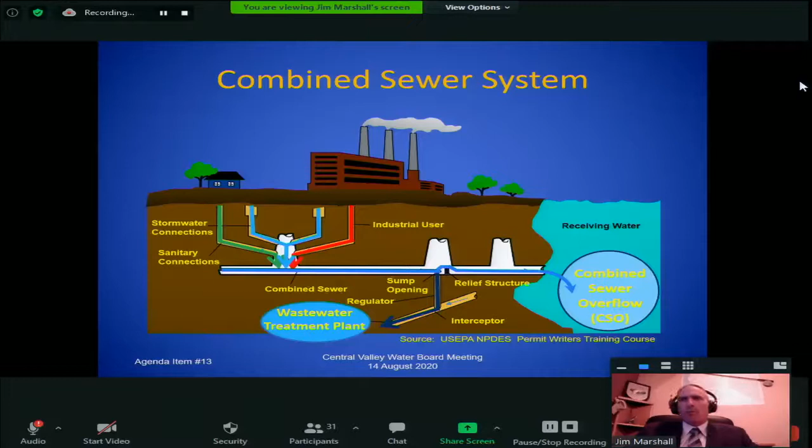Combined sewer systems are unique and are permitted differently than other NPDES dischargers. So next, I will discuss the basics of the regulatory framework for combined sewer systems.

Combined sewer overflows are defined as a discharge from a combined sewer system at a point prior to the publicly owned treatment works, or POTW. Unlike most typical wastewater treatment plants that discharge continuously, overflows from combined sewer systems occur infrequently for short durations and only as a result of significant storm events.

Combined sewer overflows are point source discharges subject to the Clean Water Act's NPDES regulations. Combined sewer overflows are regulated by US EPA's Combined Sewer Overflow Control Policy that was adopted in 1994.

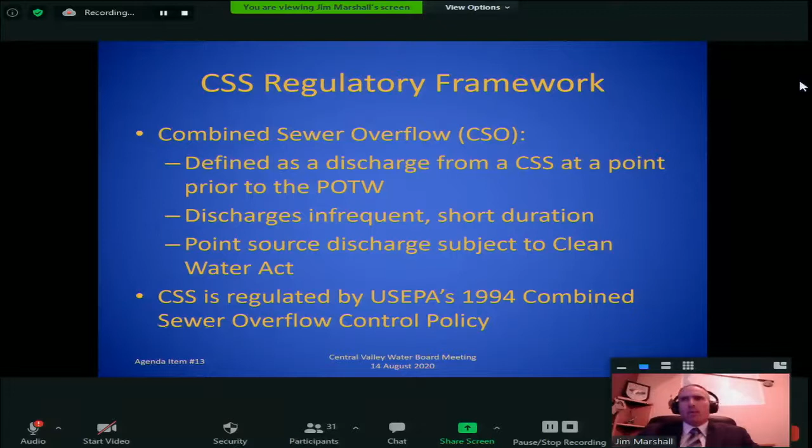The Combined Sewer Overflow Control Policy was adopted to provide a national framework for communities to comply with requirements of the Clean Water Act. The two main elements of the policy are implementation of 9 minimum controls, which are technology-based actions that require implementation of best management practices to reduce combined sewer overflows and their effects on receiving water quality. The second aspect is the development of long-term control plans for controlling combined sewer overflows to ensure protection of water quality standards. I will discuss these in more detail a little later in my presentation.

So next I will discuss the combined sewer system operations for the City of Sacramento system. This is a slide I showed earlier of the combined sewer system. The Sacramento combined system includes both in-system storage facilities and treatment facilities that provide storage to reduce the number of combined sewer overflow discharges.

The in-system storage facilities include oversized sewer pipes or storage vaults, such as the McKinley vault that I will discuss later. These in-system storage facilities are used to equalize peak flows from high rainfall events that can overtax the collection system. The storage systems help reduce the number of combined sewer overflows to the river and reduce surcharging of the system that can result in combined sewer system outflows and flooding. An outflow is where the pipes are surcharged and combined stormwater and wastewater exit the system.

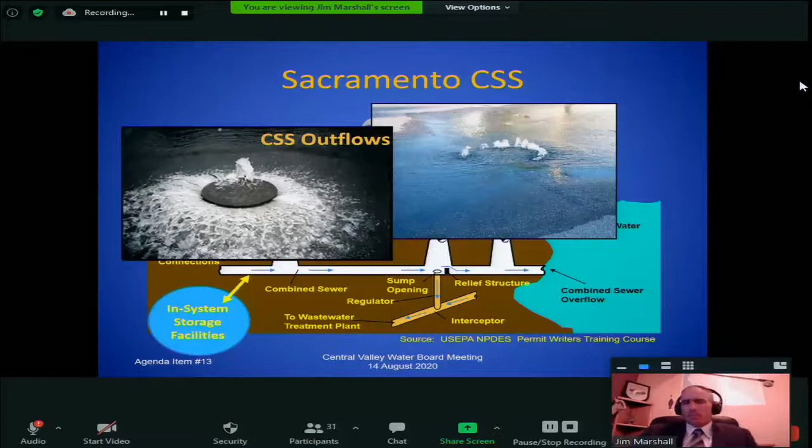The Sacramento combined system also includes 2 treatment plants that provide storage. After storm flows subside, combined wastewater stored in the treatment systems can be routed back to the wastewater treatment plant. If a discharge is needed, the Sacramento combined system is able to treat most of the discharges with primary treatment and chlorine disinfection.

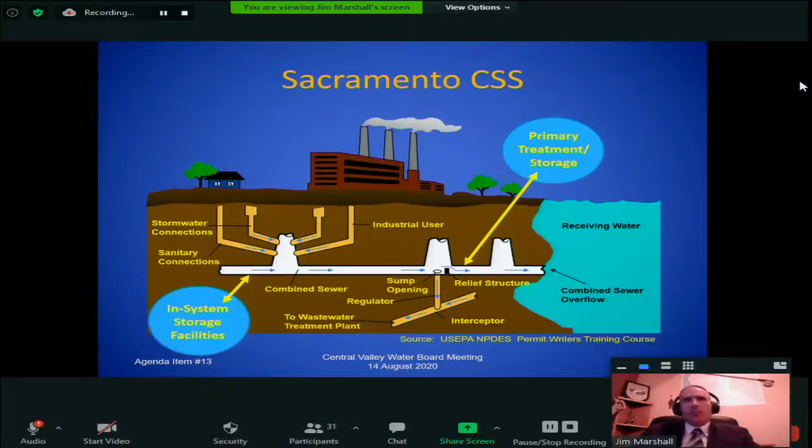So under most conditions, the typical operation is routing up to 60 million gallons per day of flow from the collection system to the Sacramento Regional Wastewater Treatment Plant. The annual average daily flow rate sent to Sacramento Regional is approximately 17 million gallons per day. The proposed permit requires the city maximize the amount of combined wastewater that is routed to the Sacramento Regional Wastewater Treatment Plant for treatment. The city accomplishes this by utilizing the storage in the system.

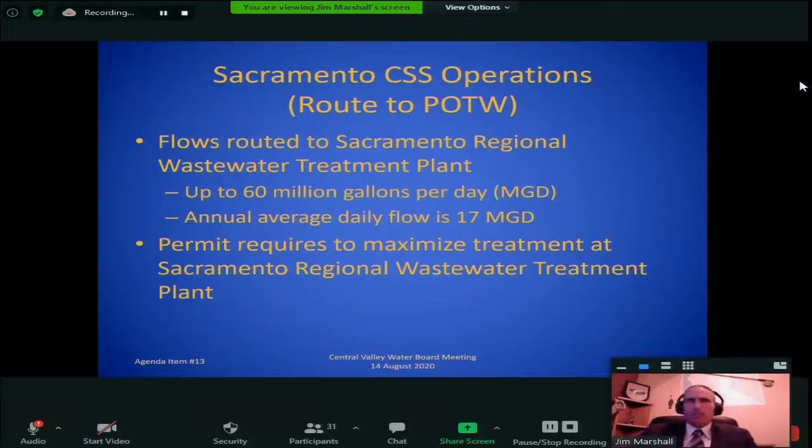However, when the Sacramento combined sewer system is overtaxed during rare extreme high stormwater flow conditions, the system discharges mixed stormwater and sewage to the Sacramento River with only primary or no treatment, which carries the risk of public exposure. The risk is minimized during the time period of these discharge events due to high river flows and stormy weather in which contact recreation is minimal.

For the Sacramento combined system, nearly all combined sewer overflow discharges are treated. When storage capacities are depleted, the mixed stormwater and wastewater receive primary treatment, chlorine disinfection, and dechlorination prior to discharge to the Sacramento River. The events are typically infrequent and short in duration, about 4 to 5 hours, but can last for a day or more during large storms. Over the past 10 years, the city has averaged 5 discharge events per year.

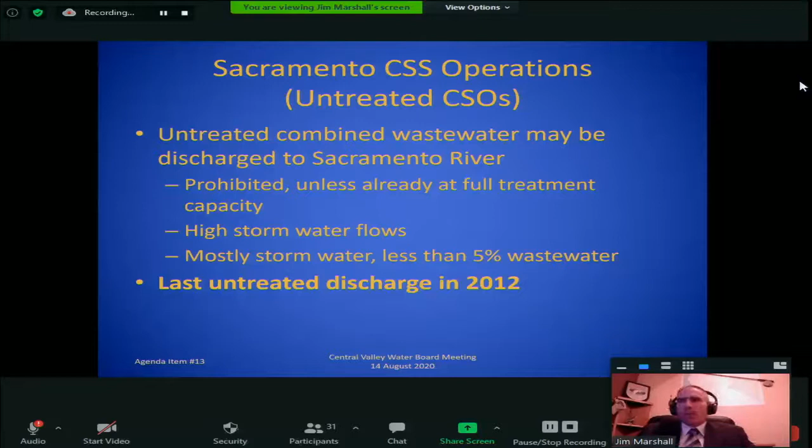During extremely wet conditions, untreated mixed stormwater and wastewater from the combined system may discharge to the Sacramento River. The proposed permit prohibits untreated discharges unless the city's treatment systems are operating at full capacity. These discharges are very rare and dictated by high stormwater flows in the system, where wastewater makes up only a small fraction of the total flow. The last untreated discharge was in December 2012.

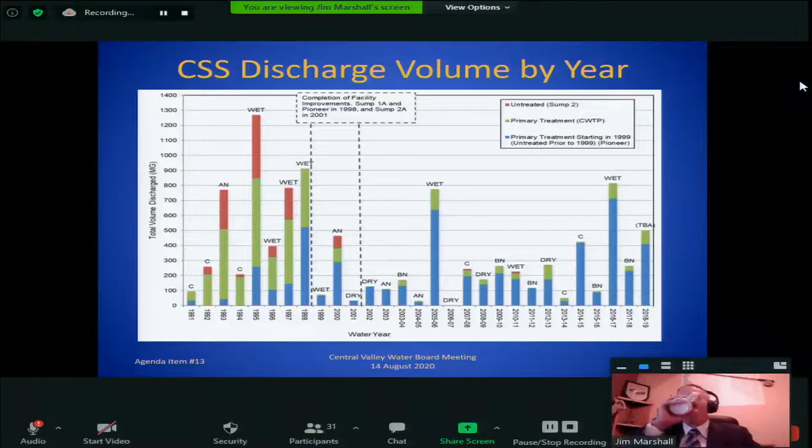Excuse me. So next, I think I need some more water. Hold on a sec. The tea wasn't cutting it.

All right, so next I will discuss the main permit requirements for the combined sewer system. The permit includes effluent limitations and monitoring requirements. Effluent limitations are included based on best management practices for operation and treatment to minimize discharge of total suspended solids, settleable solids, pH, and pathogens. Effluent limitations are also included for chlorine residual, temperature, some pesticides, and methylmercury to implement water quality objectives and total maximum daily loads to protect beneficial uses of the Sacramento River.

Sorry. Furthermore, the proposed permit includes monitoring requirements for effluent and receiving water to evaluate compliance with limits and characterize the discharge and receiving water for next renewal. Having trouble here.

All right. The proposed permit requires continued implementation of the 9 minimum controls included in the CSO control policy, which are best management practices. Some of these best management practices include proper operation and maintenance, maximizing collection system storage, maximizing delivery to the Sacramento Regional Wastewater Treatment Plant, providing primary treatment of combined sewer overflows prior to discharge, and providing public notification when overflows or outflows occur. These controls are implemented as provisions in the proposed permit. The discharger is required to submit annual reports demonstrating compliance with the 9 minimum controls.

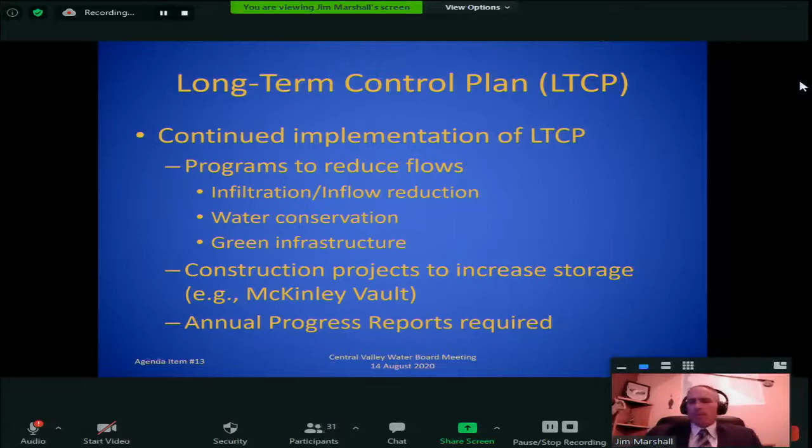Due to concerns about increasing flows from growth within the city, such as the rail yards and river district, the proposed permit includes a new provision requiring the city implement measures to ensure growth does not result in additional CSOs, outflows, or an overall reduction in percentage of flow delivered to the Sacramento Regional Wastewater Treatment Plant. In addition, an update to the long-term control plan is required to estimate the 30-year build-out flows and identify projects to address increased flows, as well as evaluate the outflow goals that have been in place since the late 90s to ensure they are adequately protective of public health.

Consultation with appropriate public health officials is required. Finally, the city must update the design storms that are used for their modeling based on current climatic information and considering the effects of climate change.

Finally, the proposed permit requires an updated water quality assessment to evaluate the effectiveness of the combined sewer system operations in meeting water quality standards in the Sacramento River to protect beneficial uses. The city last conducted a water quality assessment in 2013 that demonstrated water quality standards were being met. Due to recent construction of nearby downstream drinking water intake and new statewide bacteria water quality objectives, board staff will be looking for a thorough evaluation of possible impacts to the municipal and domestic water supply beneficial use.

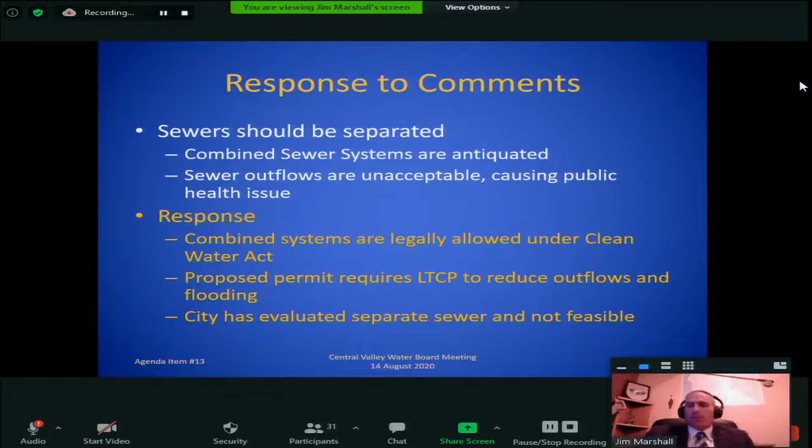The issue of continued improvement of the Sacramento combined system versus construction of separate storm and sanitary sewer systems was studied extensively in the 1990s. Following a series of major outflows that were flooding the streets, residents, restaurants, and businesses, the Central Valley Water Board issued a cease and desist order in 1990, which required the city to submit a detailed technical report and propose future time schedules for improvements to the combined system to reduce the outflows. The city submitted the subject reports, and the Central Valley Water Board adopted waste discharge requirements, approving the city's interim operational changes until final improvements could be made.

The city conducted numerous studies between 1990 and 1994, including an evaluation of the option of sewer separation. In the meantime, as previously discussed, US EPA established the combined sewer overflow control policy that set a consistent national approach to regulate combined sewer systems. The city studies determined that separation was infeasible due to the magnitude of construction, waste generation from removal of the existing combined sewer system, increased water quality impacts, and substantial costs.

More immediate actions needed to be taken to address flooding issues. In 1996, the regional board updated the waste discharge requirements, accepting the proposed solution and implementing EPA's CSO control policy. This put the city on its current path to develop projects to minimize flows and increase storage throughout the combined system to reduce outflows and flooding.

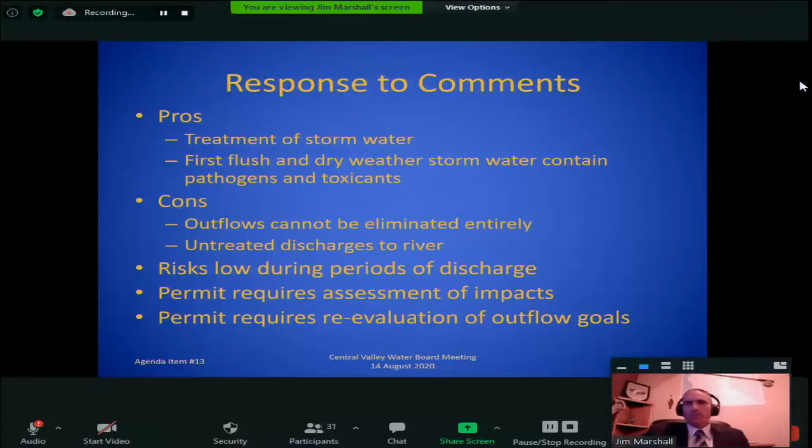The next comment is a concern about extensive growth in the Sacramento combined sewer system. New planned urban growth will increase flows, resulting in more outflows and overflows.

The city's combined sewer system development policy requires capacity management. Flow increases from new development cannot result in an increase in outflows or overflows. Developers have to offset flow increases with projects that reduce outflows and overflows.

The city is also implementing projects that result in reduced flows, such as water conservation, infiltration and inflow reduction in the separated sewers, and green infrastructure projects to reduce stormwater runoff.

Although the city has policies to address growth, board staff share the concerns that growth could result in increased combined sewer overflows, combined system outflows, or an overall reduction in the percentage of flow delivered to Sac Regional, and have modified the tentative permit to include additional provisions.

As mentioned earlier, the proposed permit includes new provisions to address growth and a requirement to update the long-term control plan to evaluate 30-year build-out flow. In addition, the long-term control plan annual reporting, the proposed permit requires the city specifically address what they did the previous year to manage flows due to growth.

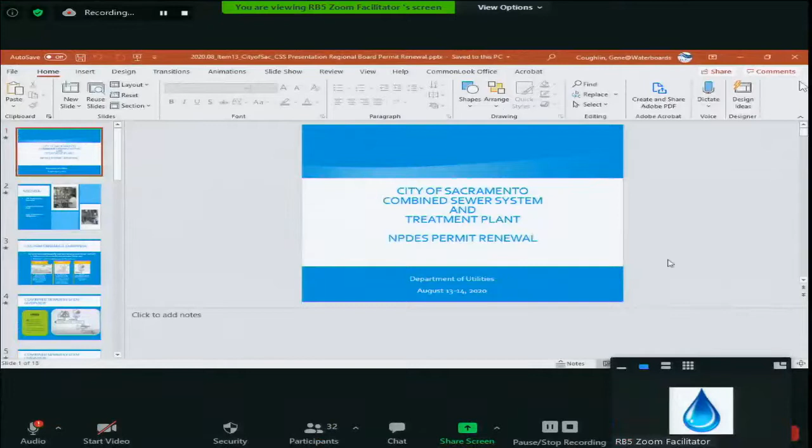What works best, Gene? I am prepared to run that for you. I just want to make sure I load the correct one. Is that the City of Sac CSS presentation? Yes, let me start that for you. Thank you. Okay, I will share my screen. And you should see that now. Excellent, thank you very much.

All right, I will go ahead and get started. Chair Longley and members of the board, my name is Tony Bertrand, and I am the engineering manager for the City of Sacramento Department of Utilities, and I have taken the oath. Thank you for the opportunity to provide information about the city's combined sewer system. I would first like to thank the board staff for the hard work they've done to develop the permit before you today for your consideration. Next slide, please.

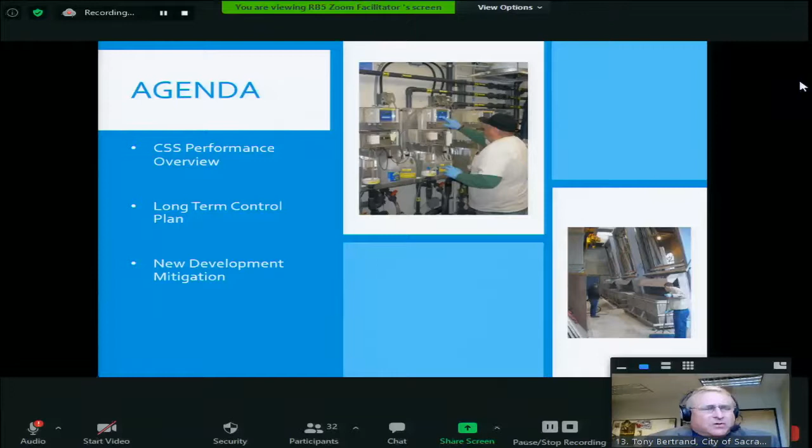Today, I will be covering the following items: an overview of the combined sewer system performance, an overview of the long-term control plan, an overview of new development mitigation, and some background on the decision not to pursue system separation. I realize that some of these items are similar to what board staff Marshall presented. I believe that while some of it is redundant, I take a little bit of a different approach on some of these, so I'm going to go ahead and go through the slides as they're presented. Next slide, please.

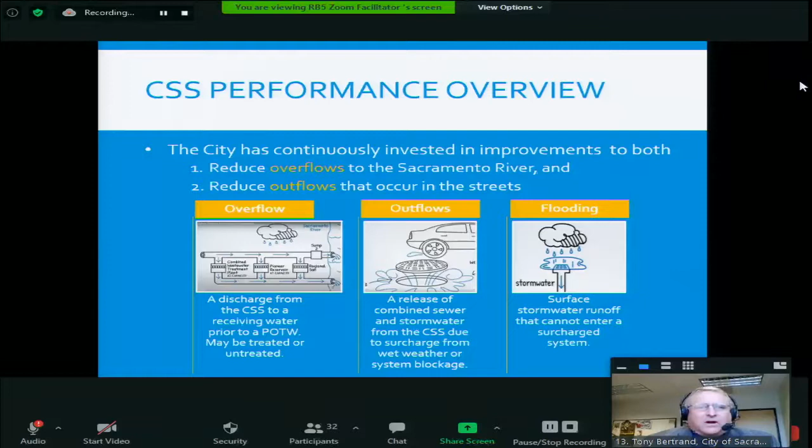Operationally, there are three different stages of discharges from the combined sewer system. Stage one includes flows up to 60 million gallons per day, including all dry weather flows and small storm event flows. All of stage one flows are sent to the regional treatment plant for secondary treatment, representing greater than 90% of the annual wastewater and stormwater flows into the combined sewer system.

As Jim noted earlier, the average daily wastewater or dry weather flows are only about 17 million gallons a day, so the other 43 million gallons per day are available for the treatment of stormwater.

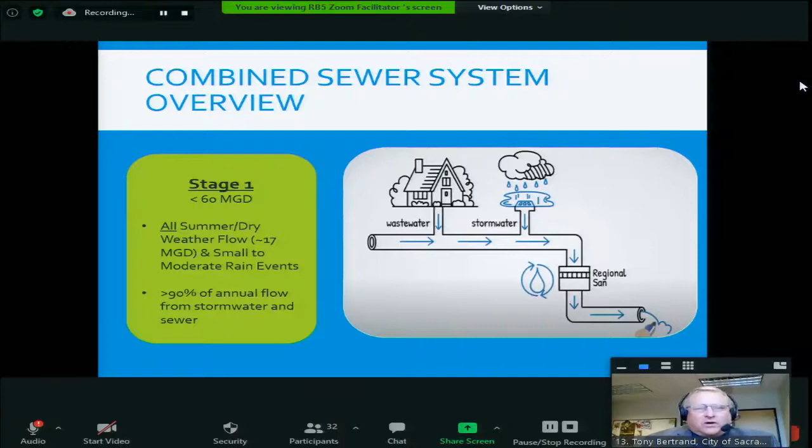Stage two includes flows between 60 million gallons per day and 440 million gallons per day. During stage two, flows greater than 60 MGD are sent to our two combined sewer treatment plants. These plants both provide primary treatment that includes removal of solids, disinfection with chlorine, and dechlorination prior to discharge to the Sacramento River. Less than 10% of annual flows are sent to the combined sewer system treatment plants. Stage 2 is typically reached during storms that produce greater than 1 inch of rainfall or high intensity rainfall events.

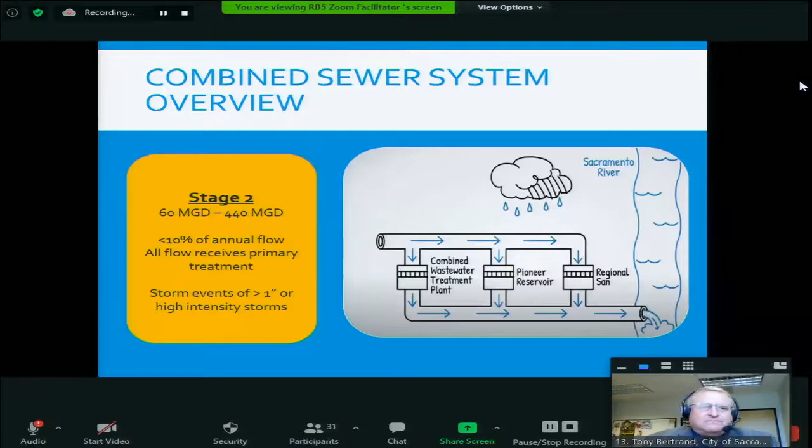Stage 3 is reached when flows are over 440 million gallons per day and the capacity of the two primary treatment plants is surpassed. The flows that cannot be treated are discharged directly to the Sacramento River. It's important to note that an untreated discharge bypassing our primary treatment plants has not occurred since December of 2012, and for that event, several rain gauges captured precipitation exceeding the 5-year and 10-year return period storms.

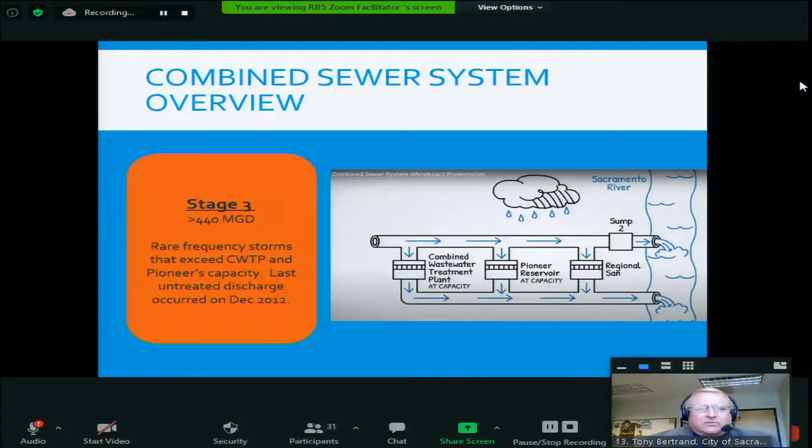During this year, greater than 99.9% of sewer flows were sent to the regional wastewater treatment plant for treatment. In addition, 3.8 billion gallons of stormwater received secondary treatment at the regional plant, and 0.45 billion gallons of stormwater received primary treatment by the city's two wastewater treatment plants. This stormwater would have been discharged directly to the Sacramento River without treatment if it were a separated system.

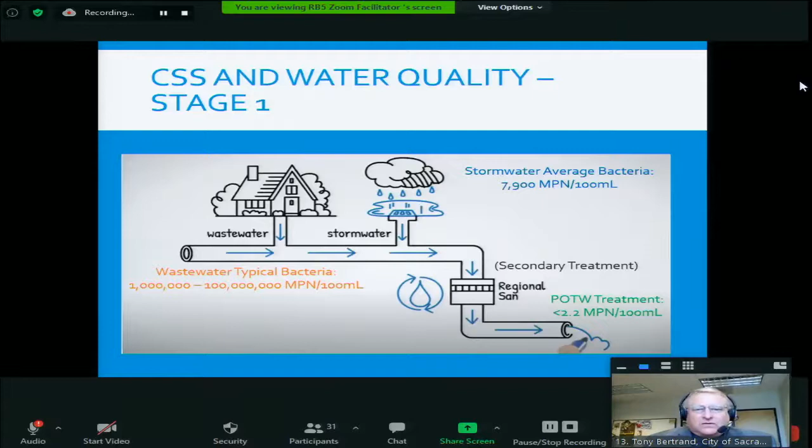Now to talk about water quality. There's a water quality benefit to having a combined system that is not always recognized. During stage 1, all dry weather flows, such as runoff from irrigation and what would be considered an illicit discharge in the separated storm system, receive secondary treatment at the regional treatment plant. This schematic shows typical levels of bacteria in the wastewater and stormwater systems and how the regional plant treats both the stormwater and wastewater to less than 2.2 mpn per 100 milliliters.

The water quality benefits during stage 2, when 60 MGD of stormwater and sewage are being treated by the regional water treatment plant, and the additional flows up to 440 MGD go to the city's two primary treatment plants. Primary treatment results in bacteria levels of less than 8 on average, just slightly higher than the bacteria levels after treatment at the regional plant.

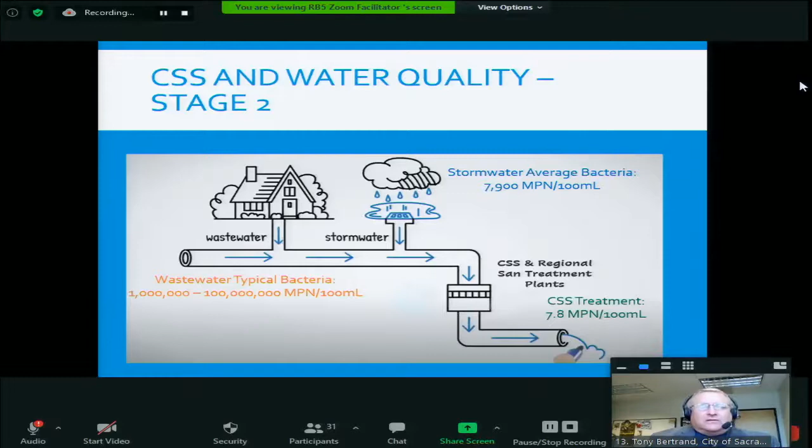So far, I've been talking about overflows from the combined sewer system that are discharges to the Sacramento River. Now I will discuss outflows. These are flows that occur when the system is at or above capacity and flows end up on the street. This has been an ongoing challenge, and the city has completed many projects since 1995, with more in construction or planned that will provide significant reductions in outflows.

From 1995 to 2018, work completed under the Combined Sewer System Improvement Plan included projects with a total cost of approximately $124 million. These projects reduced outflows by approximately 50%. From 2019 to 2026, $57 million is estimated to be spent on projects that are completed, in construction, or planned per the long-term control plan. These projects are estimated to reduce the remaining outflows by approximately 38%.

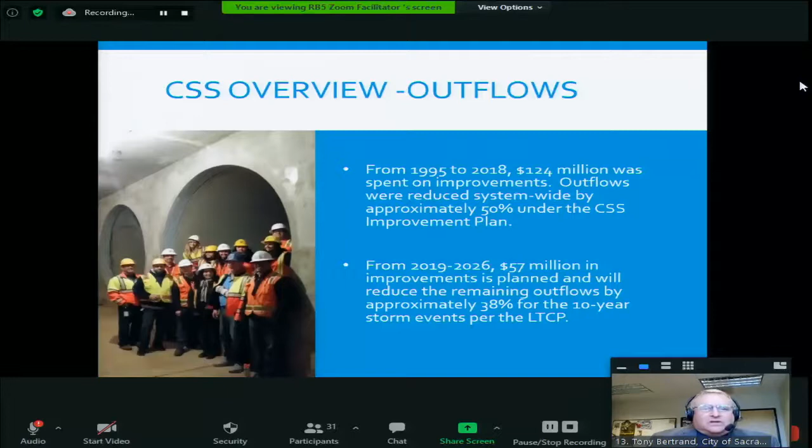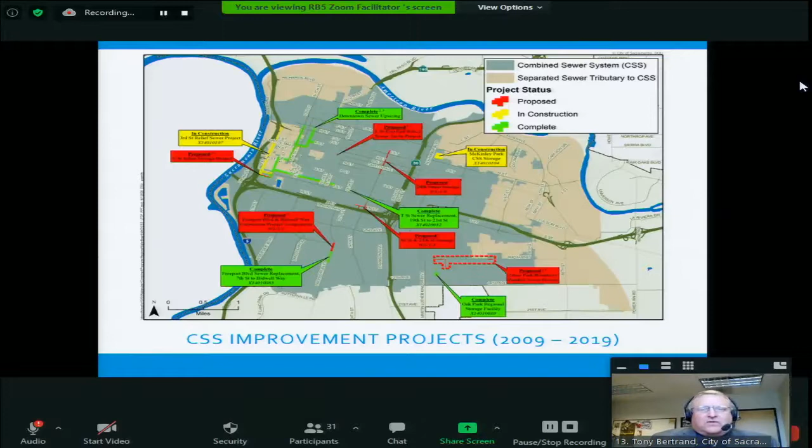This slide shows current and planned projects since 2009, with completed projects highlighted in green, those under construction in yellow, and those planned in red. The focus of these projects has been on reducing outflows and flooding. As you'll notice, the projects are distributed throughout the city, prioritizing the areas with the largest outflows.

In 2018, phase 1 of the long-term control plan was initiated. This plan utilized an adaptive management approach for reducing outflows and flooding while minimizing overflows. Phase 1 includes 6 of the highest ranked capital projects and 3 pilot projects. I will cover the 6 capital projects on the next slide. The 3 pilot programs include a green infrastructure program, a rainfall-derived inflow and infiltration program, and a water conservation program.

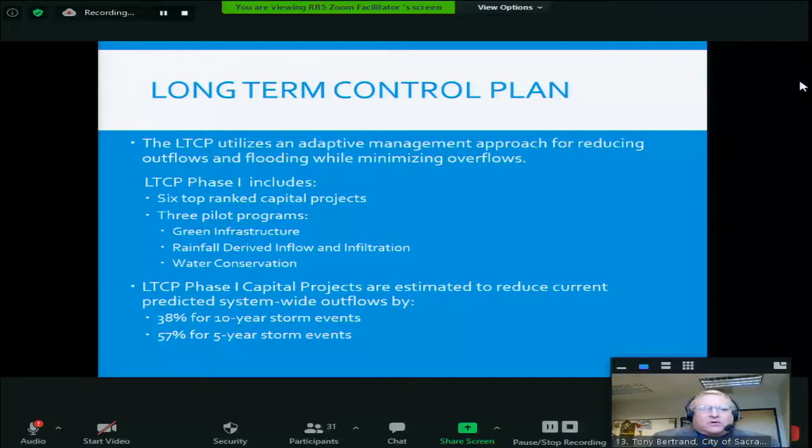As covered in the previous slide, the capital projects are estimated to have reduced system-wide outflows and flooding by 38% for the 10-year storm and up to 57% for the 5-year storm. The reduction from the other programs will be evaluated as they're developed and implemented. Next slide, please.

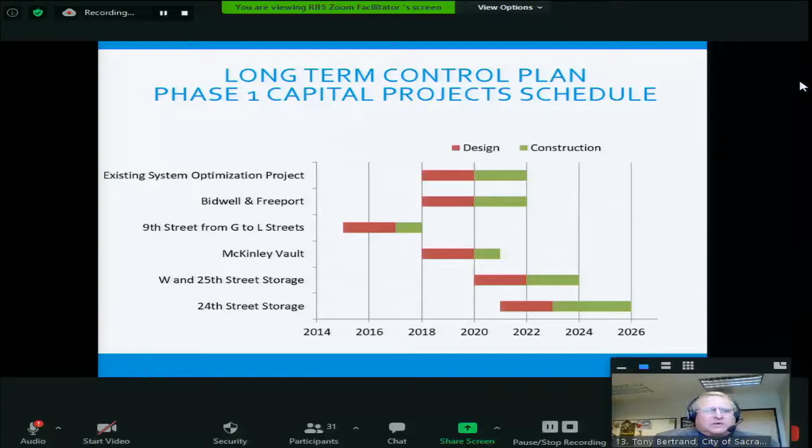This table shows the schedule for completion of the 6 highest ranked capital projects that are included in the long-term control plan phase 1. The 9th Street project, as you see, has been completed. The McKinley Water Vault is under construction and should be completed soon, and the remaining projects are in different stages of design. This work represents a capital investment of approximately $57 million and is planned to be completed by 2026.

Next slide, please. So now I'm going to move on to new development mitigation. I know that's been a big question. The city recognizes that there can be increased flows into the combined sewer system from new development. The city has several tools in its toolbox to assure flows to the combined sewer system from new development are mitigated. These are divided into 2 categories that are both required for all projects.

First, wastewater mitigation options include paying a combined sewer system mitigation fee, participating in a planned combined sewer system improvement project that includes mitigation for the specific project, or providing on-site mitigation.

Second, stormwater mitigation options include providing on-site mitigation such as a detention basin, participating in a planned combined sewer system improvement project that includes mitigation for specific projects, installing green infrastructure, or paying a stormwater mitigation fee. A couple of items to point out are when a project pays mitigation fees, these funds can only be used for projects that provide mitigation in the combined sewer system.

And the Department of Utilities has staff located at the Community Development Department office to assure every new project that increases wastewater or stormwater flows provides the required mitigation. Next slide, please.

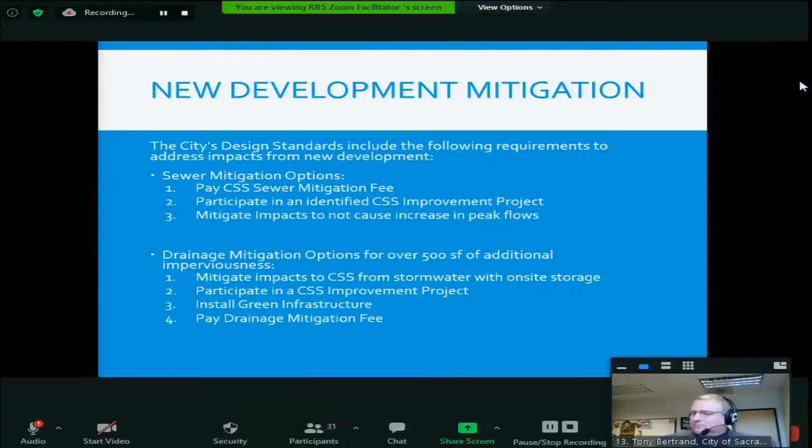An example of how development project wastewater and stormwater flows within the combined sewer system are mitigated is the Rail Yards project. For those that aren't familiar with this project, it's a 220-acre master plan development in downtown Sacramento. The Department of Utilities staff have been participating in the planning for the project for many years. One of the major challenges was the mitigation of wastewater and stormwater from the development.

The mitigation requirements include the separation of wastewater and stormwater flows within the development area. This required the construction of a new stormwater pumping station and discharge pipes to the Sacramento River. In addition, combined sewer system development impact fees will be required for all projects, and no vertical development can be completed until construction of a major pipeline replacement and upsizing in 3rd Street is completed.

The master planning for the Rail Yards project also included upsized wastewater pipelines throughout the project to provide capacity to facilitate redirecting wastewater flows from the River District area directly to 3rd Street, bypassing the wastewater flows from a large portion of the combined sewer system. These mitigation requirements ensure that the development of the Rail Yards will not cause increases in outflows and overflows from the combined sewer system. Next slide, please.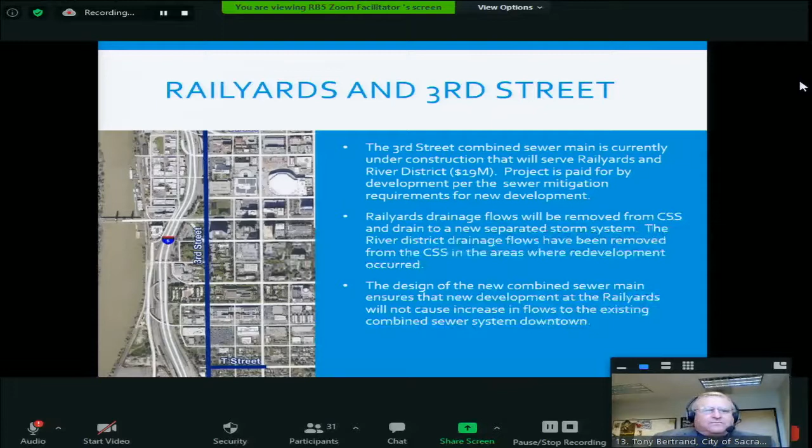First, the planning level separation cost estimate was approximately $2.3 billion in today's dollars. We believe this cost estimate is low. Next, construction would need to be spread over 20 to 30 years. Every street in the combined sewer system area would be impacted, and limited rehab on the existing system would be done during this time.

Based on the 30-year construction period, it equates to an annual capital improvement budget requirement of nearly $77 million per year for 30 years. For reference, that's more than 7 times the annual improvement budget of the combined sewer system for the last 7 years.

Next, because the combined sewer system is found in the oldest parts of the city, we would anticipate significant issues with existing utility conflicts that could make separation infeasible in some areas. And finally, the city would lose the water quality benefits from the treatment of first flush events. In addition, the new separated drainage system would require treatment to be incorporated into the design and construction, increasing costs. The city continues to support the decision to not move forward with separation. Next slide, please.

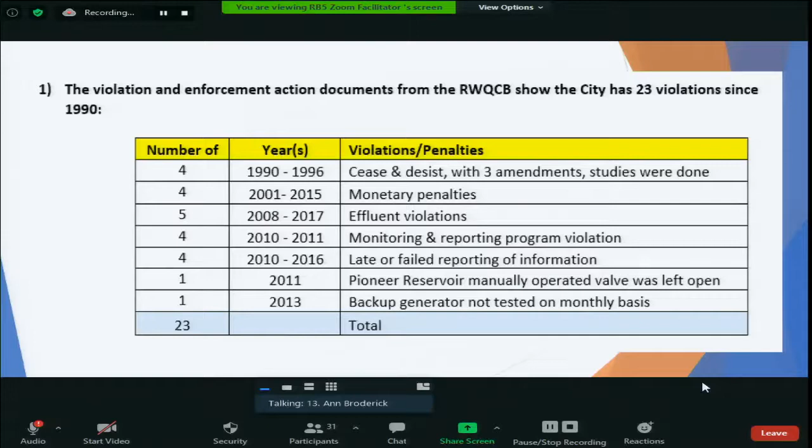The second data source I reviewed was the sanitary sewer overflow database, and it showed 111 sewer overflows from the combined sewer system since 2010. There was no data before 2010, and all records are self-reported by city staff. You will notice on this chart, 88% of the sewer spills were due to root intrusion, grease, or debris.

Beginning in 2014, they recorded whether the spill was storm-related or not: 9 were storm-related, 40 were not. Beginning in 2017, they recorded some of the size of the pipe, material of the pipe, and the age of the pipe on many entries. Most were 8-inch pipes made of clay. The average age of the pipe was about 100 years.

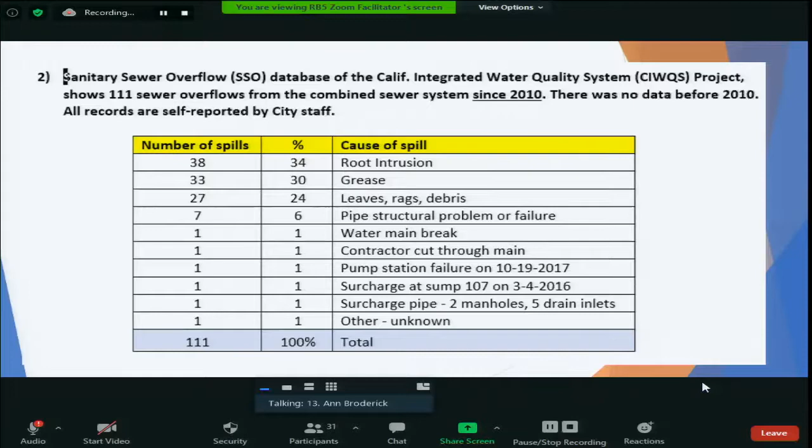The last part: what I found more alarming was that the separated sewer system, which often discharges into the combined sewer system, had over 16,000 sewer spills since 2006. 89% were due to root intrusion, grease, or debris. There have been over 350 in the first 6 months of this year.

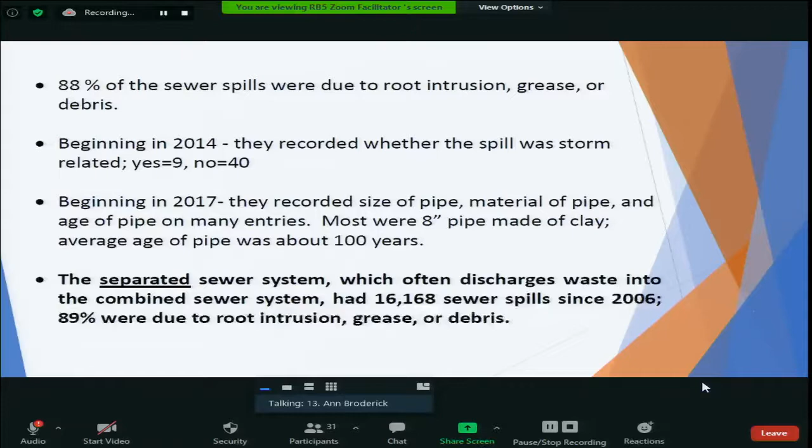The third document source I reviewed was the 2020 Stantec audit report of the Department of Utilities Storm Drainage Fund, and it said: critical information related to the storm drainage assets is lacking, such as installation date, expected useful life, original cost, material, size, and capacity. This lack of asset information made estimation of the system age and forecasting of replacement cycles based on asset ages impossible. The estimated valuation of the city storm drainage fund assets range from $4 billion to $16 billion due to insufficient data.

The sewer system is aging faster than assets are being repaired or replaced. An already aging stormwater system will continue to deteriorate as cash flow shortfalls restrict the rate of system investment, thereby increasing the risk of critical system failures. Without a rate increase, the city will be upside down by 2030. Existing revenues will not cover current operating and capital expenses.

To summarize, the city has a long history of water quality violations. Many of the incidents were not reported timely by the city, or were reported by an outside source, and yet the Regional Water Board continues to renew the permit.

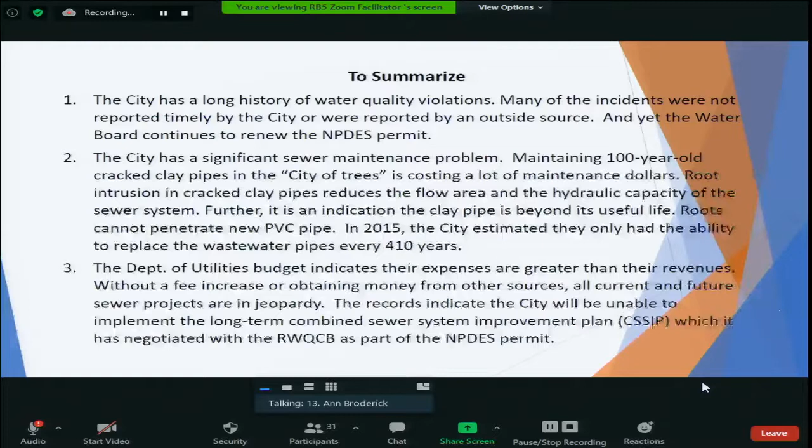The Department of Utilities budget indicates their expenses are greater than their revenues. Without a fee increase or obtaining money from other sources, all current and future sewer projects are in jeopardy. The records indicate the city will be unable to implement the long-term combined sewer system improvement plan, which it has negotiated with the regional board as part of this permit.

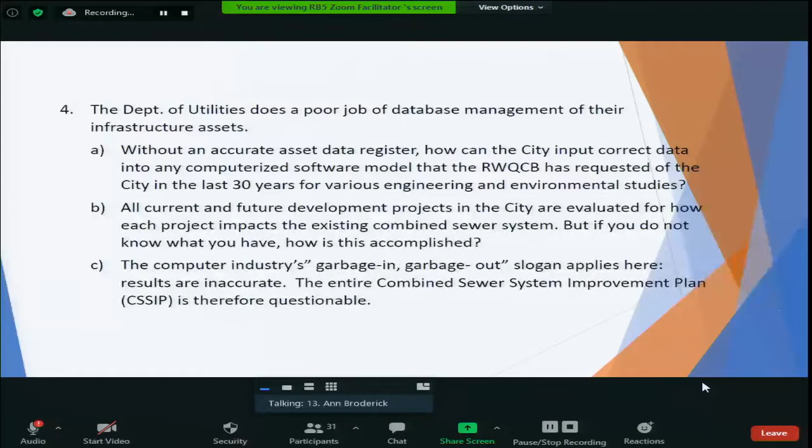The Department of Utilities does a poor job of database management of their infrastructure assets. Without an accurate asset data register, how can the city input correct data into any computerized software model that the regional board has requested in the last 30 years for various environmental and engineering studies? All current and future development projects in the city are evaluated for how each project impacts the existing combined sewer system, but if you do not know what you have, how is this accomplished? The computer industry's 'garbage in, garbage out' slogan applies here. Results are inaccurate. The entire combined sewer system improvement plan is therefore questionable.

Possible solutions and warnings: The city of Sacramento should stop all stormwater and sewer projects, as well as construction development, until its fiscal resources are in order and the Department of Utilities data register is up to date. All citizens in Sacramento deserve a separated system and a utilities department that acts in their best interest, not just those of developers and consultants. There is a real threat the city will be unable to fund the infrastructure replacement and maintenance necessary for continued reliable and sustainable service. Global warming and climate change will make the risk of critical sewer system failure even worse. Thank you for your time.

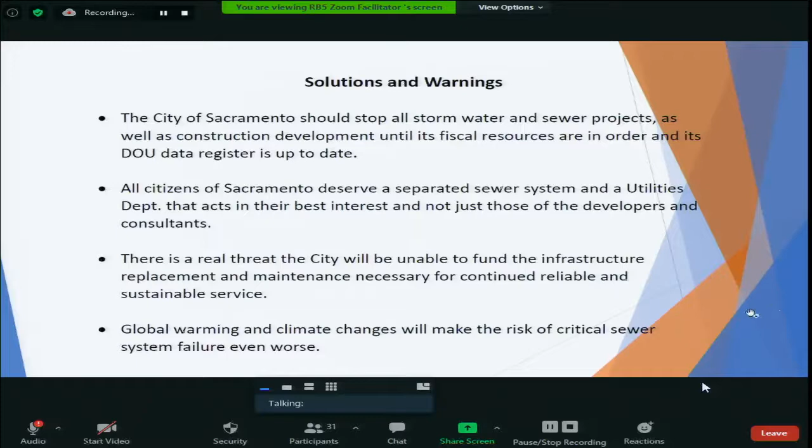Any questions by board members? Thank you very much for your presentation. Dr. Longley: I heard all those concerns, is this the time to ask staff to respond to some of those, or how will we handle it? Response: We certainly can. My suggestion would be we wait until the panel's over. This is a panel, that's correct. Okay, so hold your question, we'll wait till the panel is over, and we'll go on to the next panel member.

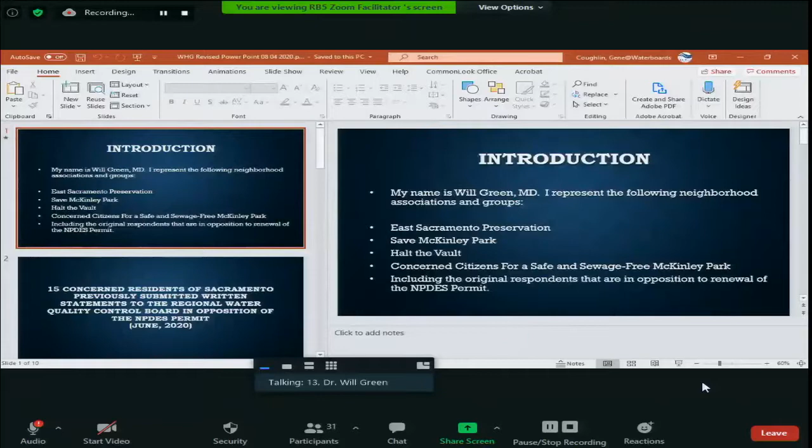Good afternoon, Chair Longley and the board. Thank you for this opportunity to address you. First, I'd like to give my commendations to Jim Marshall and Jean for helping us get organized and make this presentation possible. Welcome to my first experience with this. I'm Will Green, a retired physician, representing myself as well as several neighborhood associations and groups: East Sacramento Preservation Neighborhood Association, Save McKinley Park Coalition, Halt the Vault Coalition, Concerned Citizens for a Safe and Sewage-Free McKinley Park, as well as the 11 other respondents to the June meeting on not renewing the NPDES permit.

Thank you. Question: are we prepared for climate change? The city of Sacramento has acted irresponsibly by not protecting us from sewage contaminated storm flows. The renewal of the NPDES simply allows the city to continue this behavior. Planning for a 10-year storm protection falls short of the need. With climate change, storms intensify and increase in frequency and duration. The CSSIP has no provisions for the impact of huge storms under climate change.

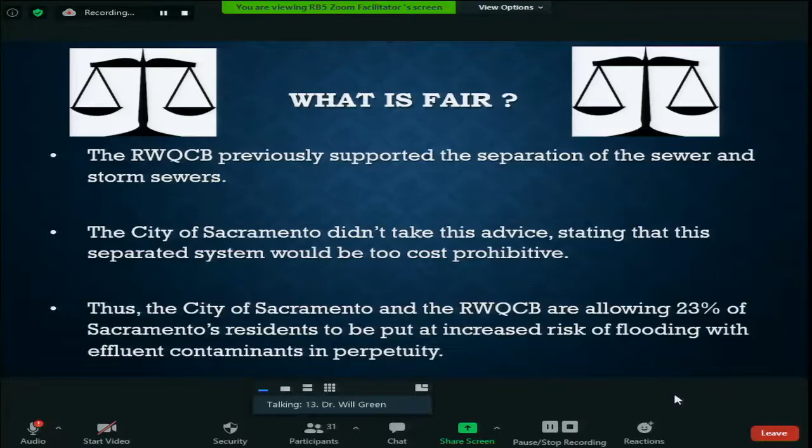So what is fair? The Regional Board previously supported the separation of the sewer and storm sewers, and this has been recommended over the last 60 years to the city - that's the problem, it should be done - and here we are in 2020 and nothing's been done other than these Band-Aid approaches. The city of Sacramento did not take the advice, stating that this separated system would be cost prohibitive. Thus, the city of Sacramento and the regional board are allowing 23% of Sacramento residents to be put at increased risk of flooding with effluent contaminants in perpetuity.

77% of Sacramento residents are already protected by its separated system. So what is the correct and fair solution? Citizens of East Sacramento, Land Park, Oak Park, and downtown have rights to a safer environment as those who are protected by the separated sewer system. Yet the city continues to put all of us at risk with contamination, with diseases, and with costly flooding.

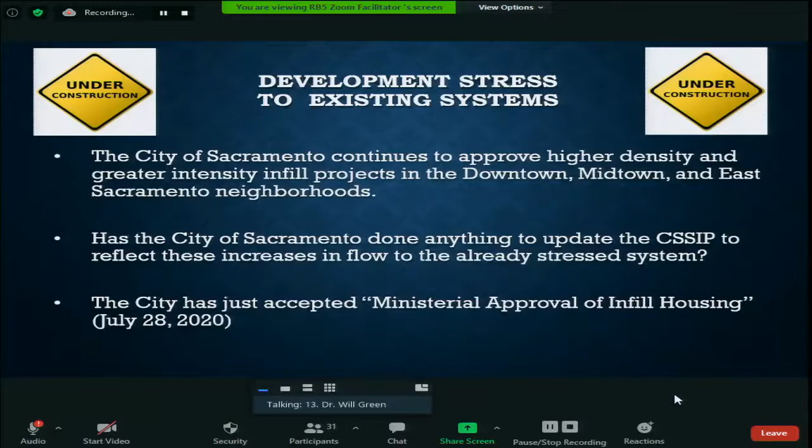The city of Sacramento continues to approve higher density and greater intensity infill projects in the downtown, midtown, and East Sacramento neighborhoods. Has the city done anything to really update the improvement system to reflect these increases in flow to the already stressed system? Of great concern - and I just learned this 2 weeks ago - City Council just accepted, quote, the ministerial approval for infill housing. This was as recent as July 28th, 2020. This means that anywhere from 2 to 200 residential mixed-use, high-density infill units can be placed in the downtown and/or the neighborhoods without environmental impact reviews and without access to public hearing.

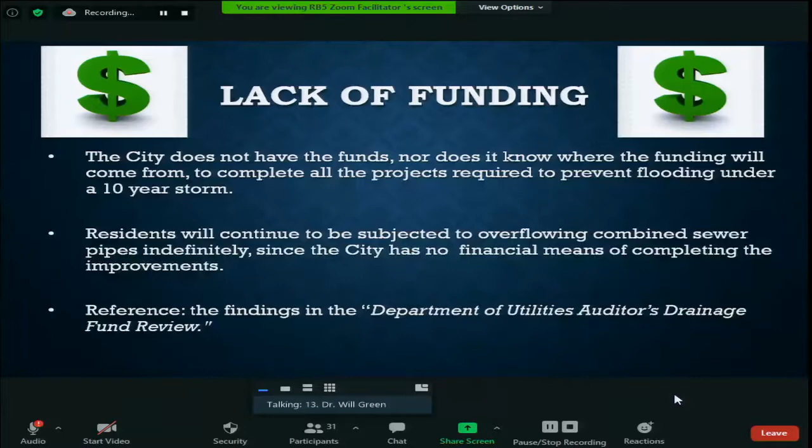So the city doesn't have the funds, nor does it know where the funding will come from to complete all the projects required to prevent flooding under the 10-year storm. Residents will continue to be subjected to overflowing combined sewer pipes indefinitely, since the city has no financial means of completing the improvements. So the problems are this: the city cannot, under its current conditions, correct the deficiencies that it promised the regional board as recently as 5 years ago. The city of Sacramento can no longer implement a functionally safe improvement plan.

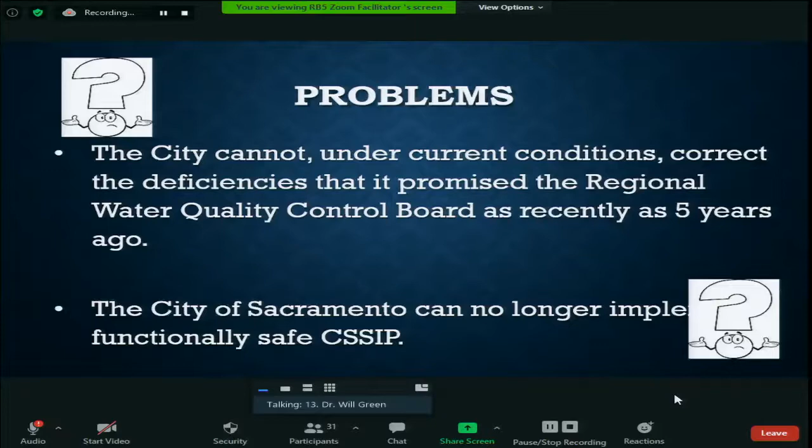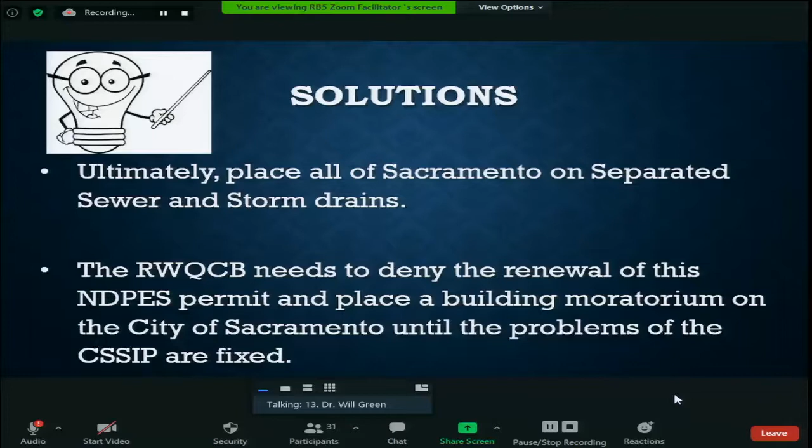So the solution ultimately is to place Sacramento and all of Sacramento on separated sewer and storm drains. The Regional Water Quality Board needs to deny the renewal of this NPDES permit and place a building moratorium on the city until the problems of this improvement flow of the combined systems can be fixed. And I mean a permanent fix. Thank you very much.

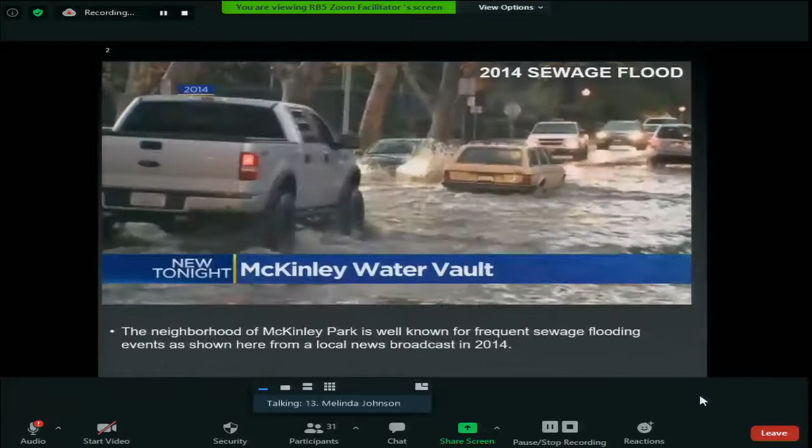Pictured here is a 2014 sewage flooding event beginning with waters gushing up through two manhole covers and nearby street drains. This rapidly flooded the neighborhood's yards and homes. The existing combined sewer system is deficient in its ability to contain sewage and rainwater from winter storms, and with the capacity of the vault to contain sewage and runoff water from current climate change projections.

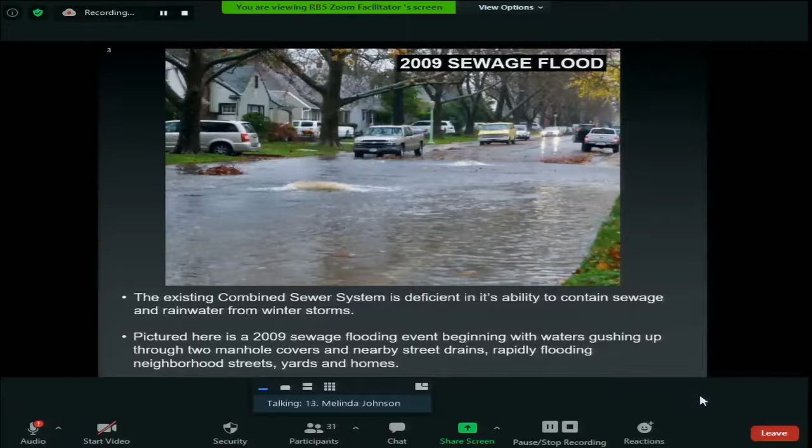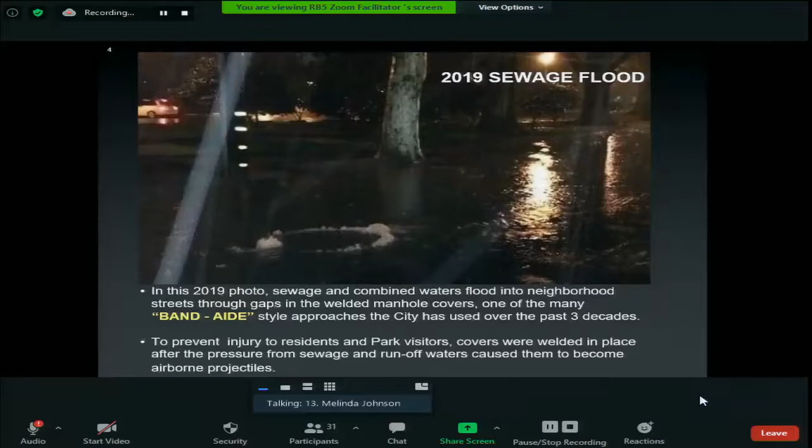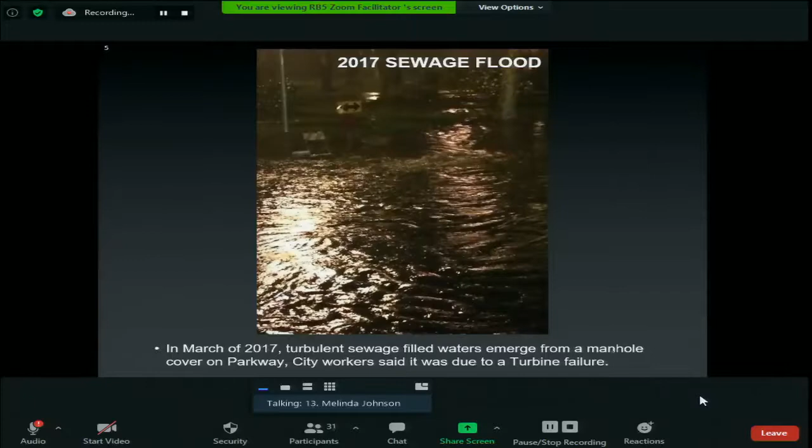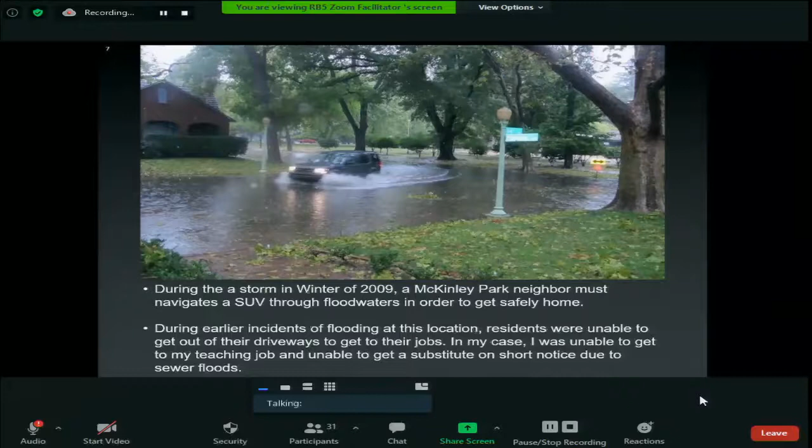During a storm in winter of 2009, a McKinley Park neighbor must navigate an SUV through floodwaters in order to get safely home.

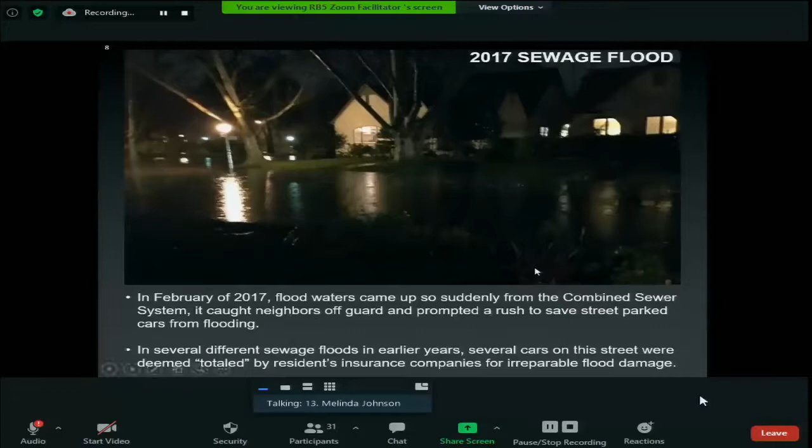September 2015, a McKinley Park neighbor rakes leaves in sewage tainted water. For decades, the city tried to blame the sewage flooding on leaf clogged drains. This is a senior citizen out raking, thinking that she's caused it by not raking her leaves properly.

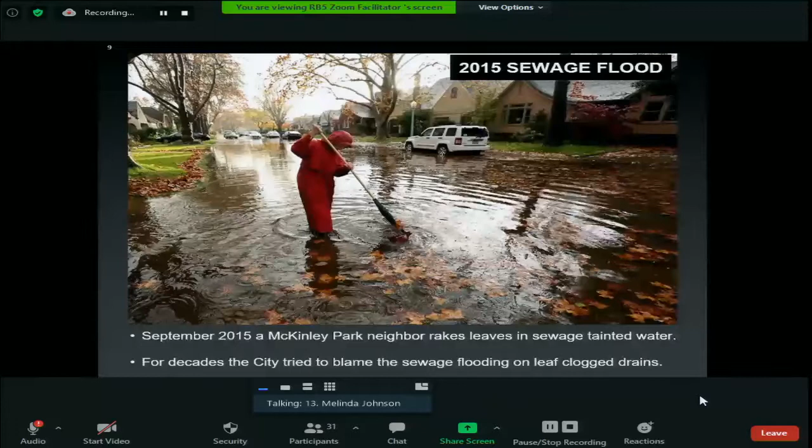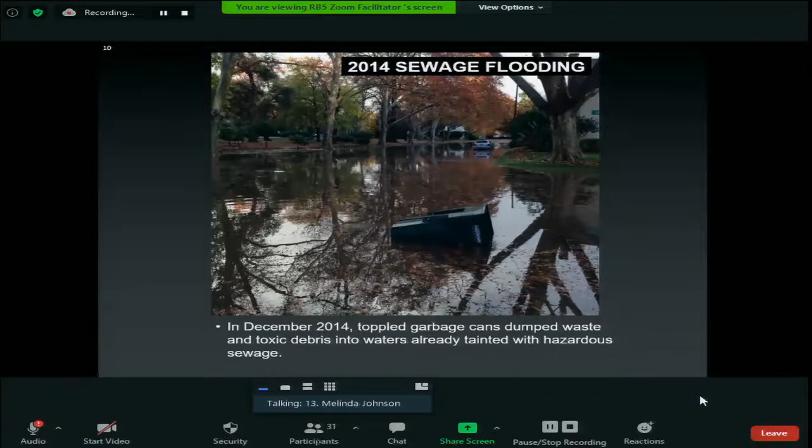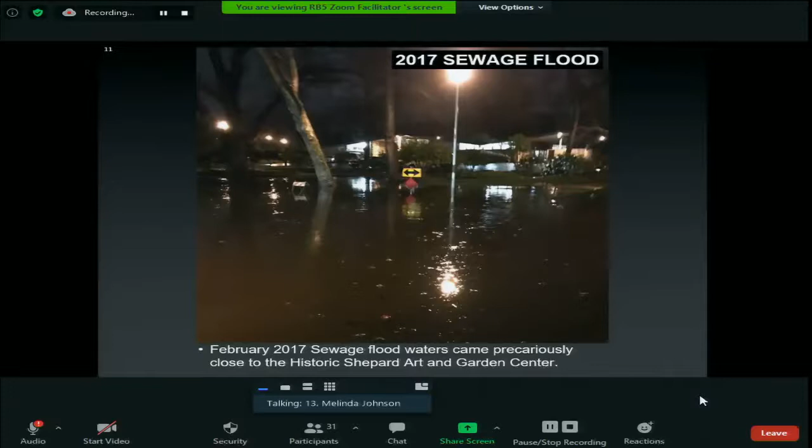The city of Sacramento's response to sewage flood calls have been hit or miss. In February 2017 here, they closed off Parkway, yet left neighbors with the task of sanitizing their yards. If city workers do respond, they are wearing head-to-toe hazmat suits.

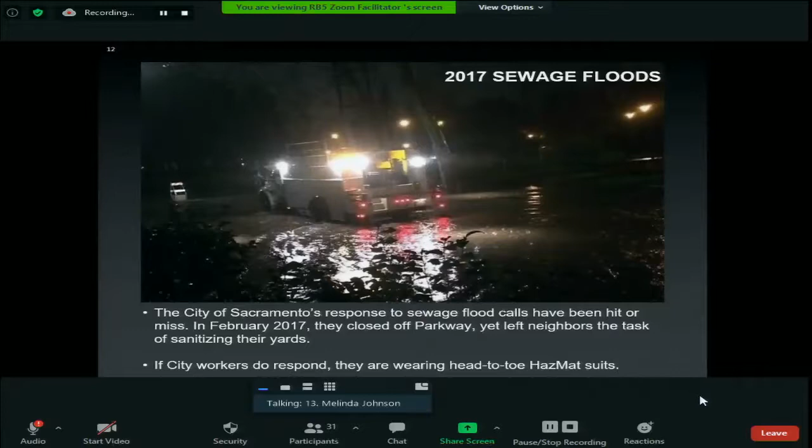For over three decades, the citizens of McKinley Park have been asking the city of Sacramento to separate the combined sewer system.

At one time they even ran a sewer pipe down our street and notified all the neighbors that they were going to hook us up to this new sewer and pay for everything. So we have a vacant sewer pipe running in front of our properties. They also told us they were going to tunnel under 3 of my neighbors' houses, including my best friend's house, to try and get this fixed. None of it's ever happened.

In November 2001, the city filed a repetitive loss report in compliance with the National Flood Insurance Program to FEMA for 3 structures damaged by sewage floodwaters in McKinley Park. I circled them in red. Those are right around the corner from my house. These houses have been in the photos—repetitive flood damage. So the city knows about this.

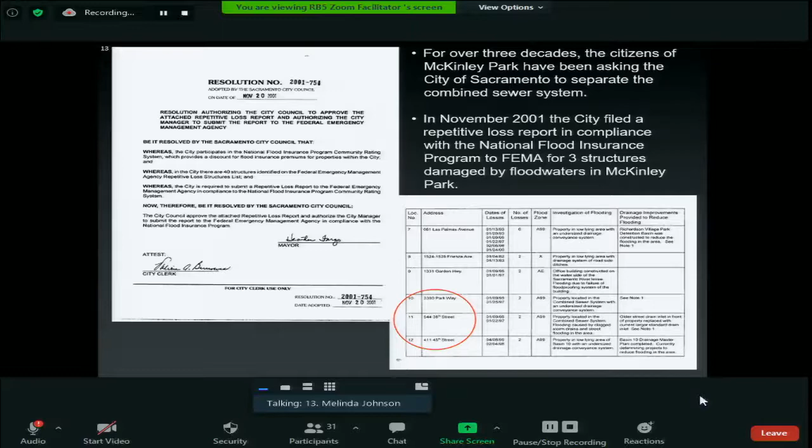City documents show that in a 10-year, 6-hour storm, 12.4 million gallons of combined sewage would course through the system. The vault contains 5.6 million of those gallons, leaving 6.8 million gallons of stormwater to overflow into McKinley Park, its streets, and its neighborhoods—much more than the sewer vault will be able to handle. With or without the vault, in a 10-year, 6-hour storm or longer, residents' health and safety still remain at risk.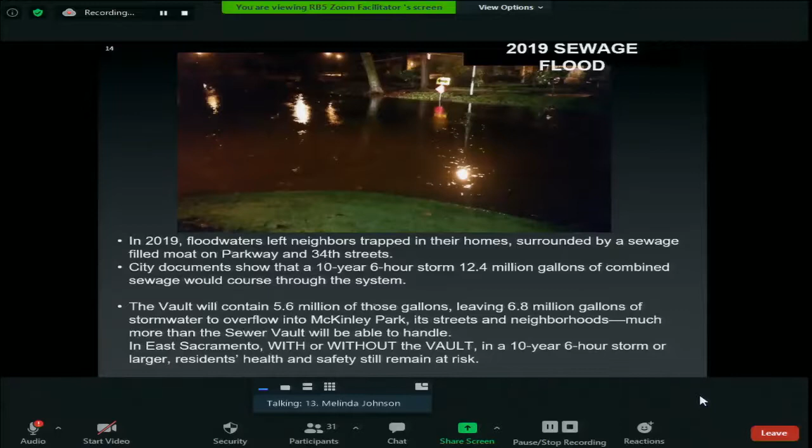Next slide. Dear board members, please do not renew the NPDES permit. It will push the decades-old need for a new and updated sanitation and separated sewer system down the road. The sewer system is separated just 3 blocks away—why don't they come and finish it off? We're the last couple of blocks before the park, and then this whole area would be done. Don't leave us with a third world antiquated sewer system built in the 1800s.

It was built in the 1890s. Taxpaying citizens of McKinley Park have a right to have their sanitation needs met. Please help us—stop the sewage floods of McKinley Park. That's what the neighbors call them, the sewage floods. It happens every year. Thank you so much. Sorry I talked so fast—I was trying to get it all in, and I did.

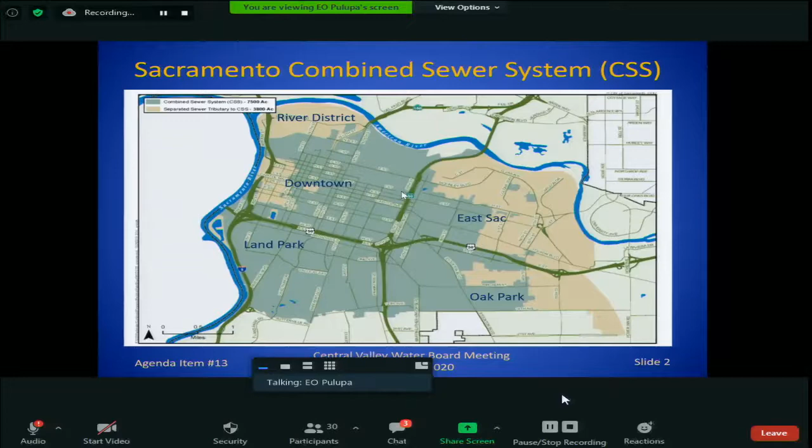Just to bear in mind—I'll share this briefly, you saw this before—here's the entirety of the combined sewer system, the downtown area we're talking about right now. I think we are actually at a point where, since we're just hearing about water quality issues and specifically flooding issues in a small segment of the city, the city has done a pretty tremendous job of reducing inflow into this combined system and then trying to create additional capacity within the system.

I know the conversations years ago were primarily on what the impacts of this combined system would have on the Sacramento River and on the discharges from the combined sewer system. To a large extent, the city has made improvements to its system and to the disinfection it provides for the flows not treated by the sewage treatment plants, such that we do not see any significant impacts to beneficial uses in the Sacramento River, which is source water for Sacramento's drinking water supply. So that in itself is kind of the foundational issue for the permit. Now we're working with communities within the combined sewer system area that are facing particular issues due to the system capacity.

And I think that's something that actually would be in place regardless of whether it was a combined system or a separate system. When you see that type of flooding in the streets, particularly around McKinley Park, it speaks to an issue of capacity.

There is a system there that cannot absorb the water flowing into it. When the city asks what have you been doing for the flooding, thankfully we're not talking about impacts to beneficial uses. We've got a permit that complies with the federal policy on combined sewer systems. That's a tremendous issue. Now we have to make sure there aren't neighborhoods within that system that are overly burdened by an antiquated system.

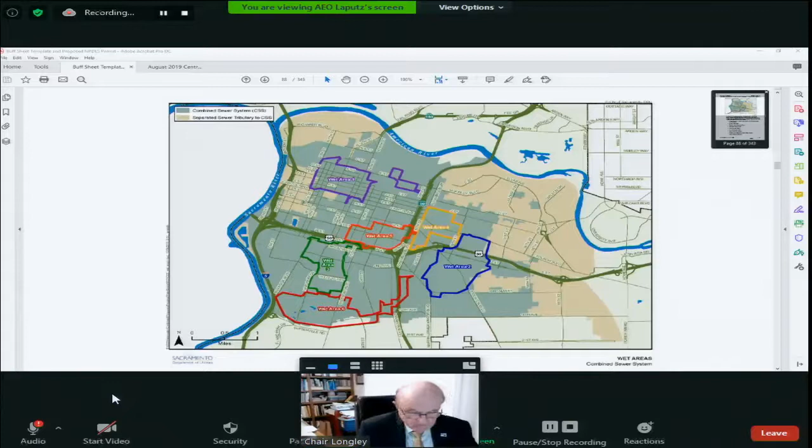I guess, Patrick, you said that the permit could be revisited at any time during the 5-year period that it's good for. What's the trigger mechanism, and could you explain a little bit what that looks like?

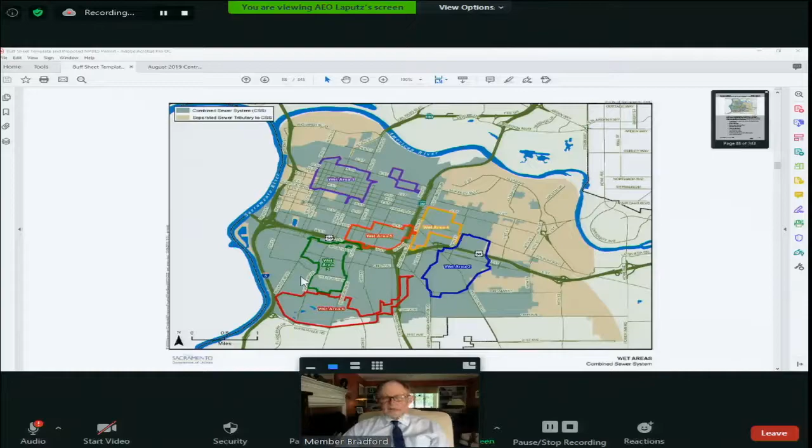Yeah, so there are reopener provisions that we could use. I think the idea when we have a 5-year permit like this, what the board has done in the past is essentially hold an information item: do we want to reopen this thing or not? Because again, big consequences behind that. Reopeners can include new information, such as the results of long-term control studies, or the results of whether the vault was effective at doing what it was supposed to do or not.